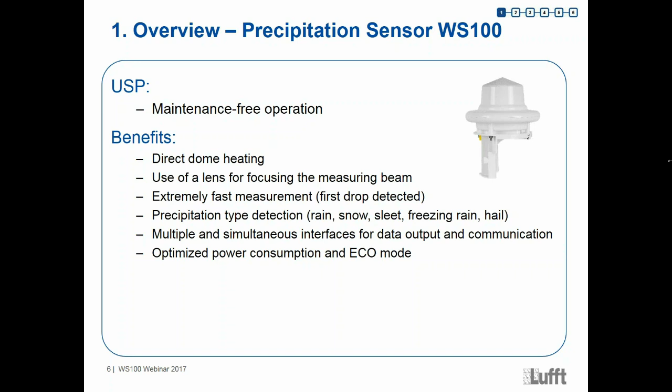So first of all, the measuring principle. So how does the WS100 in reality measure the precipitation? What we have done here is we use a Doppler microwave radar with a frequency of 24 gigahertz. Normally the sensor will detect the velocity, the drop velocity, and of course the drop size. And with this information, we can calculate the water amount in the drop, also in the snowflake, for example.

And if you go back to the sheet before, you see the new WS100 has a straight measurement area going to the sky. And that's the main new feature and benefit, because this feature will reduce the influence from outside. That means with a conic measurement area, you have influence by wind, which can change the measurement

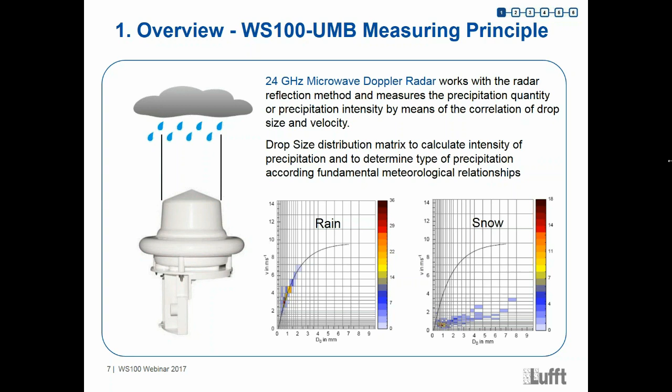And that's what the sensor can measure. The sensor can measure the velocity of the drop, and then it can classify this in a table. So that means, for example, 4 meters per second is rain in this case. On the right side, you see the same thing for snow. And if you check the velocity of a snow event, it's on average about 1 meter per second. And that's how the sensor can classify the different precipitation types.

All right, so again, the new things here for the WS100 are a new radar sensor. So also the radar sensor has changed. We have now developed a special Lufft-developed radar sensor, which we use. With this radar sensor, again, we can create a special measurement area.

In addition, we have optimized the housing here. You see that. If you compare that with the old one, it was a dome type, and this one is more like a cylinder type of housing, which will also help to change this measurement area again. So that means the housing has changed too. We have optimized the housing here.

Then we have implemented the lens to focus the measuring beam. And you see that on the picture below. Inside the WS100 you have this lens, and this lens will help to focus the beam so that we can create a straight measurement area. Another new thing is the heating, which is now directly connected to the dome wall, so that we really heat the whole dome wall, and no snow and ice can influence the measurement here.

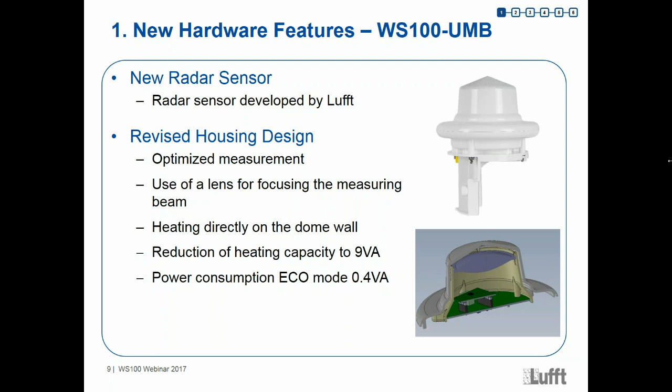So again, some comparison slides here. First, on the left side, you see some smileys, and with the smileys, we want to show you if this information or this action is done well by the sensor or not. So that means the measurement accuracy, if we compare that with the R2S, the measurement accuracy was not so good for the R2S, again, because of the conic measurement area and the influence from outside.

The maintenance frequency, you see that we have a green smiley here, is very good. It's the same like for the WS100, by the way. So there is nothing more to do here. And below we have the influence of wind, and again here we have a yellow smiley. It was not so good. The reason is again the measurement area, which was conic, and so also the wind had some influence here.

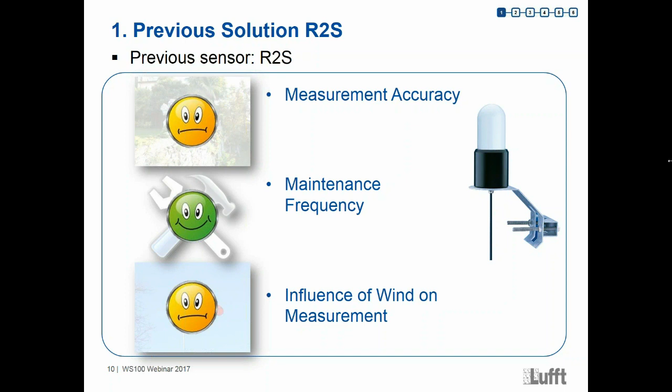So for the WS100, you see the smileys are all green. Of course, we optimize everything. We try to do that, of course, to have a better sensor now. And for the measurement accuracy, we improved the version. Again, compared to the R2S, we have now an accuracy of plus minus 10%, which was checked in our special Lufft test system here. So that was the reference here.

We have a low response threshold, and that's also a new feature here. We have now the possibility to classify different drop size classes. We have 11 of them. So that's a new feature of the WS100 compared to the R2S. The R2S did not have the possibility to give you this information.

The maintenance frequency, again, is the same like for the R2S. No maintenance is required here, and we have the low energy consumption in addition. And also because of the new measurement area we generate now with the new radar sensor, we have less influence of wind on the measurement here.

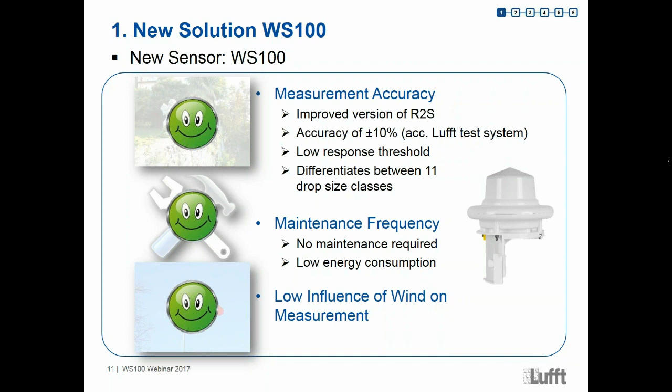So we have the technical data table here. I don't want to talk a lot about this one. Anyway, you can check that in the WS100 manual. Maybe some parts on the left. We have the interfaces again for data transfer. So we have the RS485 semi-duplex interface, 2 wires.

We have, in addition, the possibility to connect the sensor in SDI12, in UMB, of course, in Modbus, and that's also an extra thing. There is also an analog output. That means the sensor will also be able to give you a pulse signal here, so you can also connect the sensor directly, for example, to a data logger with an analog connection type.

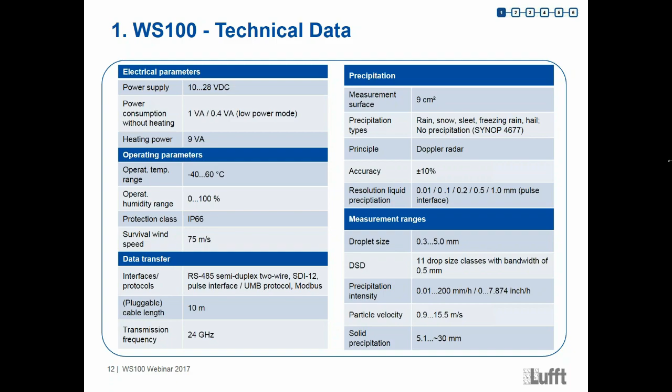Okay, connection options and calibrations. So we will talk about the connections here, and, sorry, I forgot one very important thing, because we have some nice technical tricks and gadgets here. So I want to show you now the sensor live with our special camera here.

So you see the sensor here lying on the table, and you see my hand. So you see that the sensor is not very big, right? My hand is not big and the sensor is also not very big. So it's a really smart small sensor. You can connect this sensor to a pole, and we have the fixing adapter here. That's the standard fixing adapter we use for all the different WS sensor types.

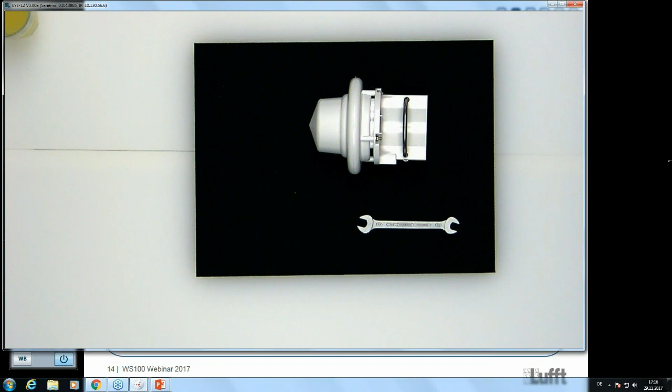And the pole diameter which can be used with this adapter is between 60 and 76 millimeters. If you want to fasten the sensor, you can use a standard wrench with the size 13 here. And so you can, of course, use it and fix the sensor easily to the pole.

And here, covered by the yellow cap, you see the connector. So that means you can connect the original WS sensor cable to the WS100 through this connector, and then you can start to install the sensor, to configure the sensor. So it's really an easy thing here. So let's go back to the presentation.

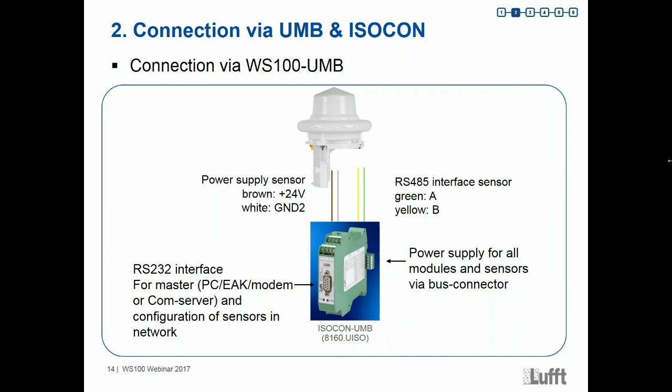So we stopped at the connection here. If you are familiar with UMB sensors, that's nothing new for you, because the connection is a standard UMB connection. So it's really easy to set it up. So I will not lose a lot of time here. I think we can go on.

So calibration is, of course, a really frequently asked question. How can you calibrate sensors? In the case of WS100, I have to tell you that an on-site calibration is not possible here. The reason is, again, the measurement principle. The radar sensor, and you heard that before, will measure the velocity of the drop and the size.

And the problem here is that if you are on site and you try to pour some water over the sensor, you will not get any values, because you will not reach the real fall velocity of the drop which is needed so that the sensor can measure the drops.

That means it is not so easy to do that. Maybe if you have a ladder which is 5 meters higher than the sensor, you can try it, but it's really complicated. So at the end, on site, a calibration is really, really complicated, and it's not so easy.

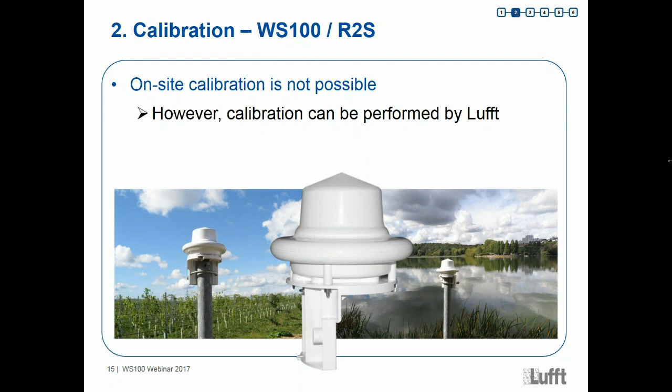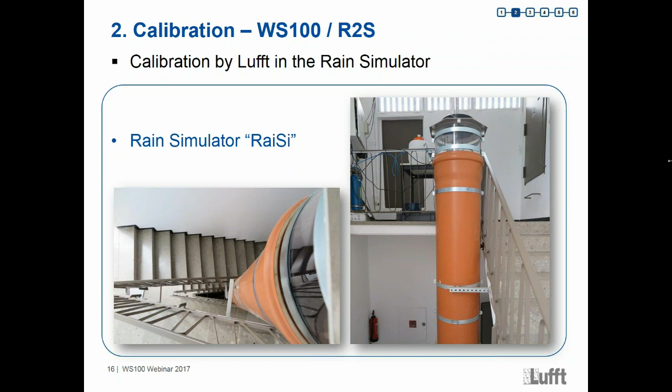For this reason, we have another possibility, because you can, of course, send the sensor back to the Lufft company. We have a rain simulator, called RaiSi. It's the pet name, let's say, of our nice reference device. The device itself is also very high, about 10 meters, because again, we need this fall down velocity, which we have to create. We can do that with that tube, which is about 10 meters high. So we can put the sensor below, and we can generate droplets at the top of the rain simulator. With this device, we are able to calibrate the sensor. So if you need that, we can do it.

So what are the target groups and the typical customer problems? First of all, the problems itself. Normally if the customer wants to buy a precipitation sensor, he has some needs. He wants to get a very accurate sensor with high precision. He needs maybe some low response thresholds to get very fast information about the precipitation event. And he wants to have a differentiation of various precipitation types.

Also, a very important fact is that the customer doesn't want to go there very often to maintain the sensor. So the maintenance frequency is a very important issue here. Contamination, for example, especially of the mechanical parts, and frequent maintenance is required. And again, the influence of wind - they want, of course, no influence of wind in the measurement. So these are the typical customer problems.

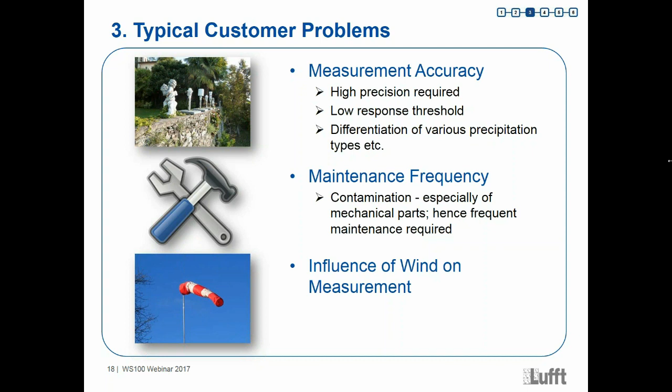So what are the special or typical applications now, for example, for the WS100? First of all, we have normally three of them. The first one is traffic management on roads. This customer needs, of course, precipitation sensors. Precipitation measurement is very important in their application. Then we have meteorological services. They also need normally very cost-effective sensors because they want to expand their measuring network with new sensors, especially in urban areas.

Everybody knows that, checking the news, we have some climate changes now, and we have a lot of precipitation events in the world which are not really normal in these days. That's the reason why people always need new sensors here. Also, hydrology and heavy rain and flood problems are known problems in our days, and for this type of application, sensors like WS sensors or WS100 sensors are needed. They also need cost-effective sensors to expand their measuring network, especially again here also in urban areas.

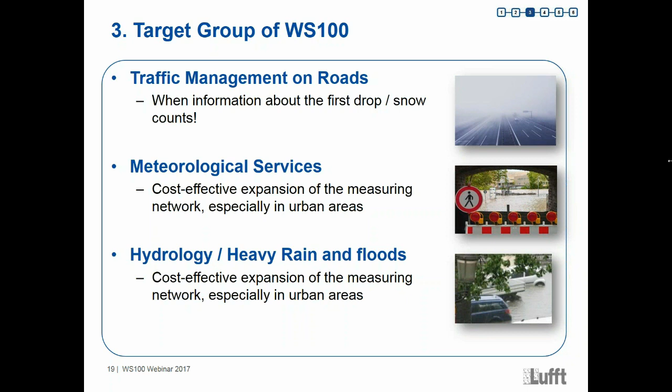So the traffic segment itself is normally divided into two different applications. The first one is the VMS station type, which is the shortcut for variable message sign stations. If you drive on a highway today, you will often meet some bridges with some signals on them, and they will give you a lot of information. The target of the customer here is to increase, with these bridges and sign information, the traffic safety, to get dynamic response to current environmental conditions. Then they have to control the traffic based on precise detection of road surface wetness, precipitation, and visibility. For the precipitation part, the WS100 is the ideal sensor here.

The reason again is that the sensor is maintenance free, so the customer can install the sensor easily and does not need to go back and maintain it again. The sensor will give you a lot of different information, for example the precipitation intensity, and the sensor has a short response time, so you can control the signals very fast and change the signal information very fast, also with the WS100. In addition, the sensor will also be able to detect a precipitation type called drizzle, which is also a very important precipitation type regarding the traffic segment.

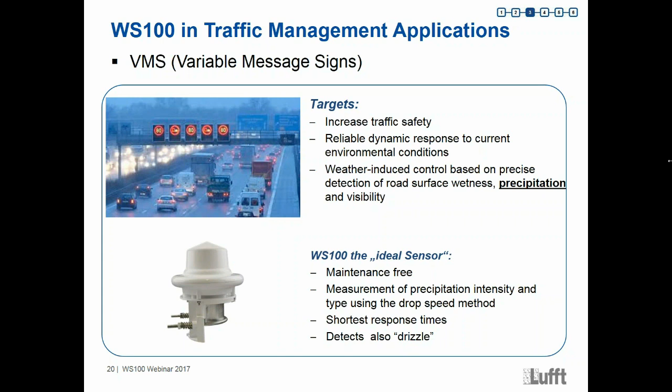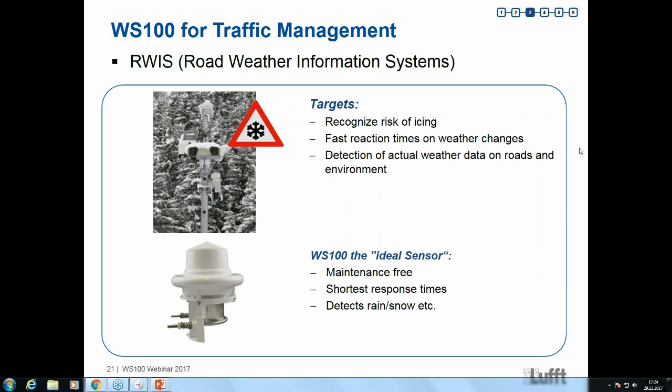So we have some other product information here. What is part of the delivery? Normally if you order the WS100 sensor, different things are included. Of course, the sensor is included. You will get a printed manual, and a 10-meter connection cable is also included in the delivery.

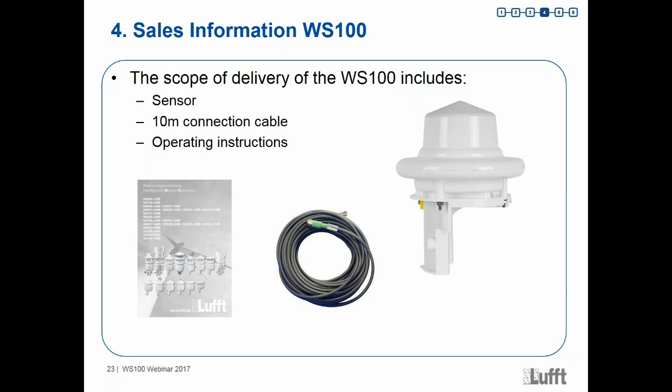In addition, you can get different accessories like our Isocon digital interface converter. That means if you want to connect the sensor to a laptop, PC, or modem, you can use this Isocon, which will create an RS-232 interface.

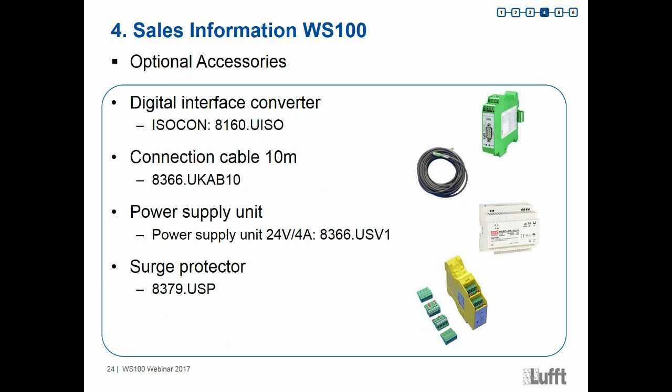Then you can also order special cables. There are different cable lengths available, for example a 20-meter cable if you want. You can also get a power supply, the standard power supply from Lufft for UMB stations, 24 volts. And if needed, you can also get surge protectors and surge protection modules.

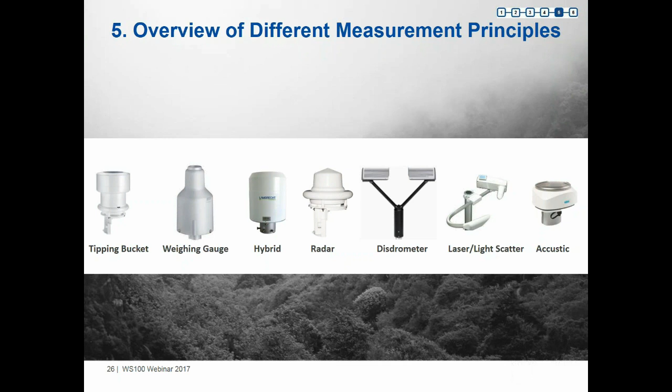The next slide shows an overview of different measurement principles. Everybody knows about tipping bucket gauges - they have been widely and globally in operation for more than 100 years in hydro and hydrometeorological networks. But in the past 20 years, various new technologies have been invented, such as weighing precipitation gauges and hybrids, which are a combination of a weighing precipitation gauge with a self-automatic emptying system based on a kind of tipping bucket measuring principle.

Then we have the disdrometers, which are capable of measuring the hydrometeor size and its corresponding velocity simultaneously. And we have the WS100 - this is a kind of new instrument in the market.

I just want to make a comparison between a tipping bucket and the WS100, and draw your attention to the widely and globally used old instrument, I would say, versus the new one, the WS100. The accuracy and uncertainty of liquid precipitation measurement is very important for most users. If we look into typical tipping bucket precipitation gauges, we find in the leaflets a specification of plus minus 2% or more, or maybe better, but under laboratory conditions.

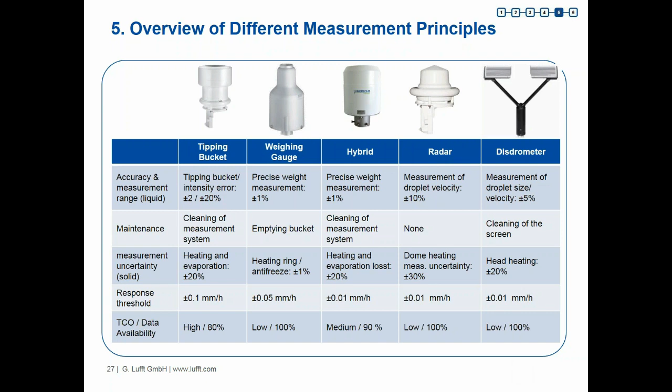So the fields of application - I've made a ranking of fields of application, and finally we see that all these different technologies which I presented are also represented in hydro and meteorological networks. The radar is one of the sensors which can be used in new trends and in hydrometeorological networks, especially for flood warning systems, especially in urban areas, as well as in automation and agricultural meteorological applications.

Each sensor does perform and measure at a site as a point measurement. But what we need is a combination of spatial and temporal information coming, for example, from a weather radar system in combination with the accurate point measurement of the precipitation stations. And both information will give a composite information, which is very important.

And we have made our mind, and we have put the question: why not combine weather radar based on, for example, dual polarization, C-band or X-band Doppler radar system with a precipitation sensor to measure and correlate punctual precipitation within a high density measuring grid?

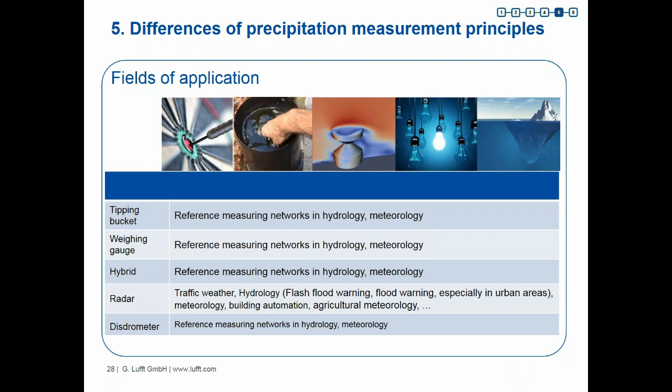Why is this important? If we refer to an urban system, it's commonly based on precipitation and drainage or discharge, and each urban system where we live is prone to extreme precipitation and flood events. And of course, that is a threat to human lives and properties.

And the issues are increase in frequency and intensity of extreme weather and convective rain events, the impact of storm, hail, thunderstorm, and heavy precipitation on buildings and facilities of the urban system, and the fallen precipitation flows off superficially as soon as the precipitation intensity exceeds the infiltration rate of the soil.

We need to know the nowcast and forecast of spatial and temporal distribution of the precipitation event to control the discharge model. And in second instance, we need to know the historical data in order to be able to improve infrastructure and channel systems, for example, to plan and construct adequate retention basins, infiltration systems and storage systems. In both cases, we need to know the true data of the composite information.

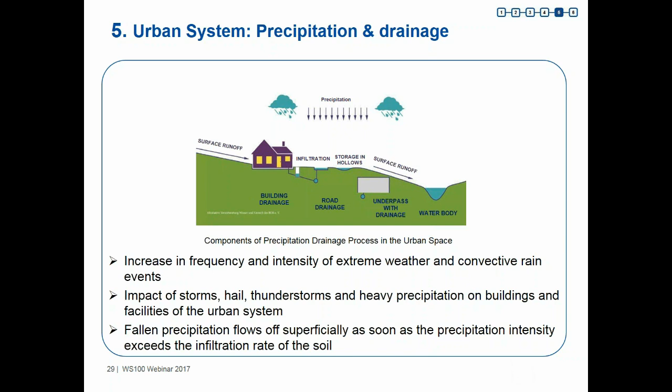I've attended a seminar last week, and there was a presentation of the German Weather Service done by Dr. Tanja Winterrath. Thanks to and in courtesy of the DWD and Dr. Tanja Winterrath, I'm proud to present some slides or illustrations of that presentation, and it's about Radolan.

Radolan is an online adjustment of the radar data. Why do we need that? The online adjustment performs the scan, and the radar image measured by the radar reflectivity and the processed intensity rates are compared to precipitation ground data.

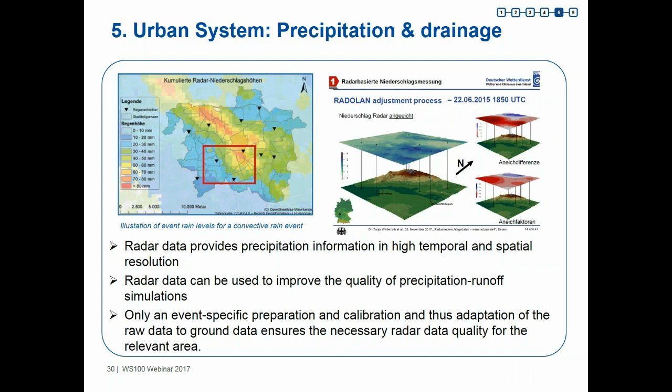Mapped and correlated geodata of radar image scan and precipitation stations allow different methods of adjustment, like a differential method or a factor method. And the intelligence system of the Radolan software will apply the appropriate method. And finally, that results in adjusted radar data that can be used to improve the quality of the precipitation runoff and discharge model and simulation.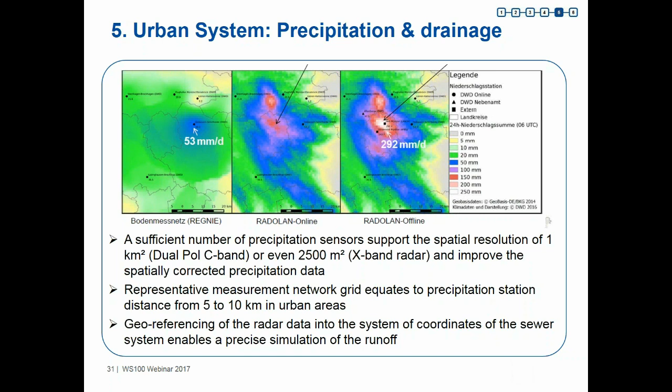Another example is a pilot project we provided to the city of Copenhagen, where we deployed a system based on rain radar software and a dual polarization X-band weather radar, along with a disdrometer.

The disdrometer provides DSD matrix, drop size distribution matrix, and calculated data like radar reflectivity and intensity of precipitation. But finally we figured out that we need more sensors in addition to the deployed disdrometer Parsivel 2.

Another nice aspect is that these weather radars only weigh 68 kilograms and are only 100 centimeters in diameter. So they can be mounted on existing buildings and don't require additional infrastructure to build. They cover a distance of 30 to 50 kilometers with a maximum resolution of 50 meters, which is quite impressive.

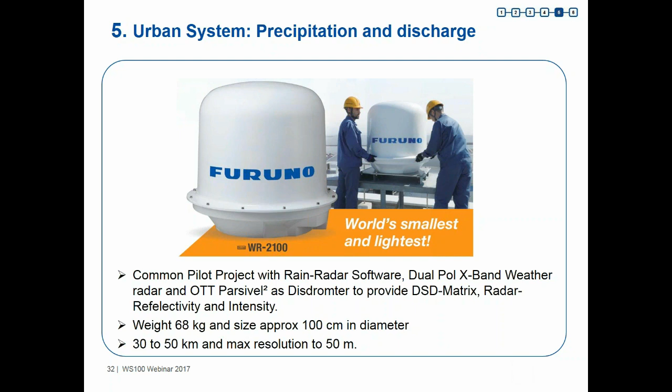Coming back to the 5 major types of precipitation sensors, we have rated them and we see trends in which applications they will be used in the near future. Coming back to the radar sensor, it's not designed or developed to be used in meteorological networks requiring highest accuracy. But this sensor is very suitable for hydrometeorological networks, traffic control systems, agrometeorological systems, and urban applications.

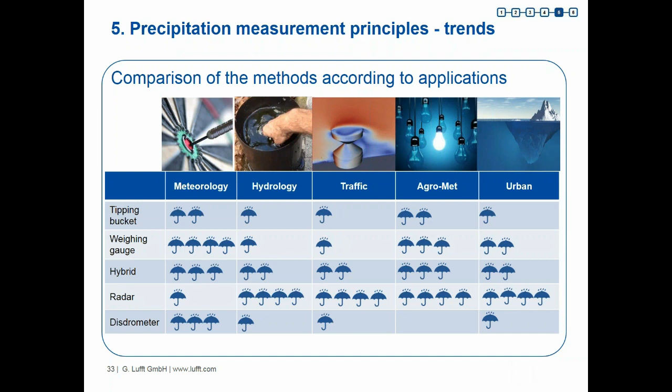This slide shows only the comparison of technical data to others. I'd like to draw attention again to the accuracy. Be aware that the accuracy of the WS100 is a little less than the others, but it requires no maintenance, which is usually needed for the tipping bucket gauge. In the last column you also see a price range for initial information.

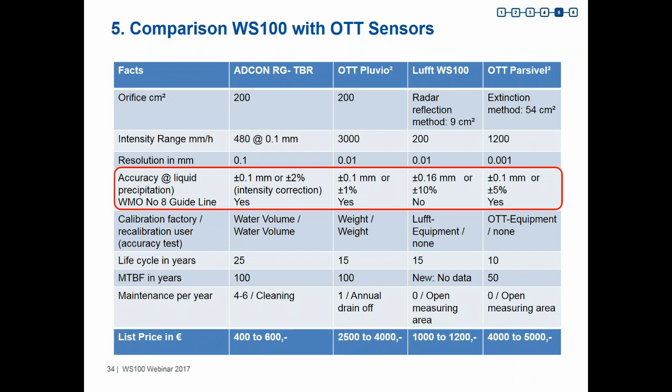Coming to a summary of our presentation: the result for the WS100 is that precipitation amount and intensity is in the range of 0 to 200 millimeters per hour.

This is compliant with European standards, and we have the type of precipitation provided by the sensor, capable of distinguishing between rain, drizzle, snow, freezing rain, sleet, and hail, and no precipitation, according to the SYNOP 4677 table. It provides an additional 11 drop size classes with a bandwidth of 0.5 millimeters, but be aware the measurement uncertainty for rain is greater than plus minus 5%, which is commonly specified in the WMO guideline number 8.

It's a very cost-effective instrument to increase network density, and it's designed for installation in urban areas. The calibration adjustment with a reference precipitation station likely relativizes the individual measurement uncertainty of the radar principle.

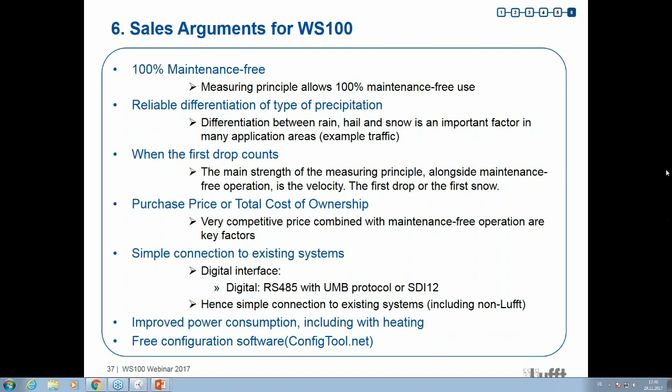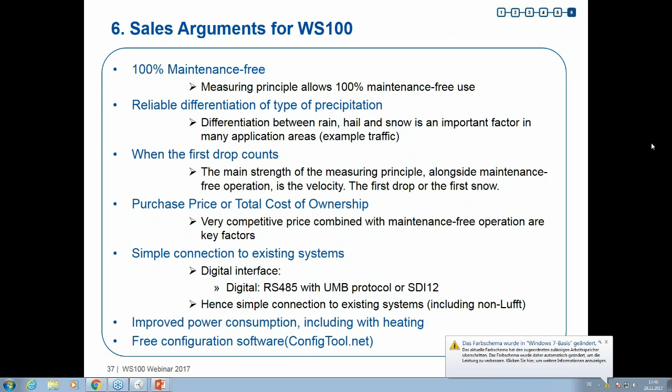First one is, how do you avoid the influence from birds or bird poop on the top of the sensor? That's a nice question, by the way. So, at the end, there is no special thing which you can do, but our experience with the R2S was that because the sensor is installed outside with rain, normally the sensor will clean itself. So this, let's say, dust or pollution of the sensor is not a real problem.

So we never had problems with such things. At the end, the sensor will be washed by the precipitation outside. That's funny, but it is like that. And due to its design, it's not very attractive for birds. Anyway, normally the heating is very strong, and if the sensor is heated, it's too hot for them to sit on the sensor. So normally, I think this is not a real problem.

Okay, next one. How often should a calibration be done? That's a good question. At the end, that's always a question for the customer. It depends on the application itself. Normally, the sensor will be calibrated and checked in the company before delivery. And then normally you can use it without a recalibration. But again, it depends on the application.